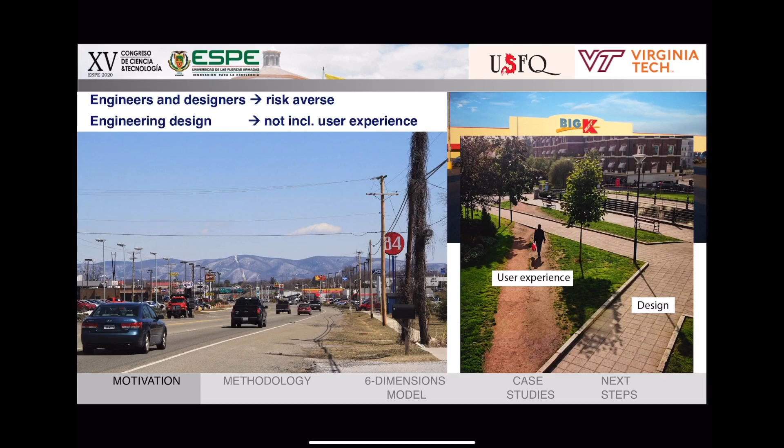Another challenge for engineers designing urban infrastructure is the little feedback from the user's experience during the design phase. Also, limiting our design to norms and codes limits our understanding of the preferences and needs for those that we design for, those using our infrastructure designs. These pictures do not show uncommon cases, but rather a case that reminds us of many places from our daily lives.

Prototyping is a field in engineering that started way back in the 1950s, and it is not until the 80s and early 90s that other engineering fields brought it back as a key component of their design processes, such as design thinking, with a new lens where prototyping is used to observe the user's experience to design the features and their mutual interaction.

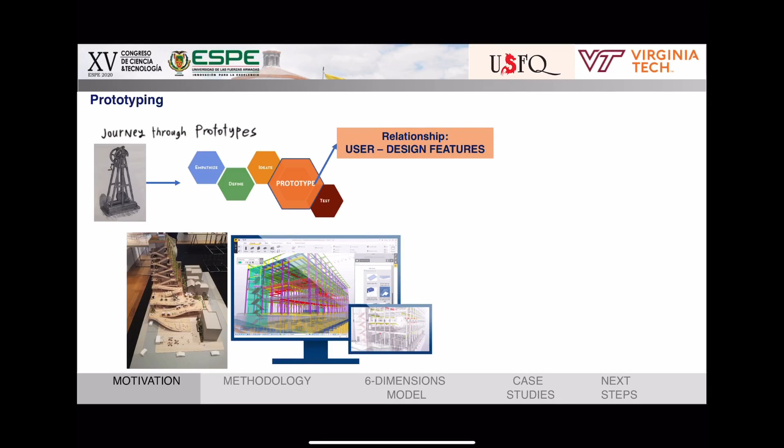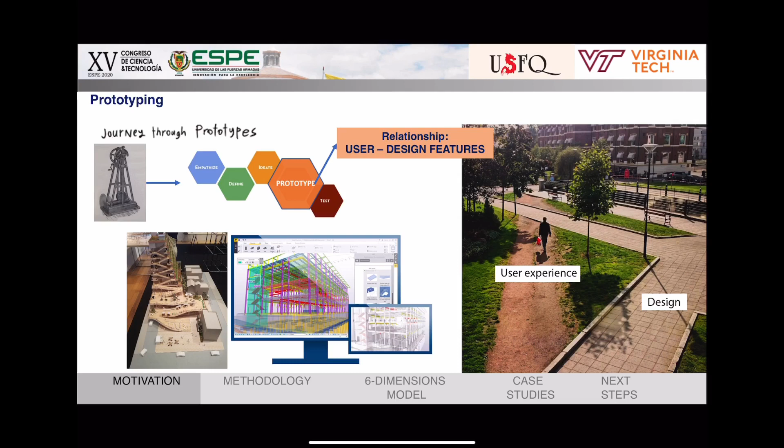In infrastructure design, civil engineers have been creating scale and virtual models, as well as architects, to prototype infrastructure design. The problem with these types of models is that they lack the ability to observe the user experience. You can design this virtually, but you can't see actually how the user interacts over time with the design. But you can do this with physical prototypes.

So, in an effort to contribute to the design of sustainable infrastructure systems, the objective of my research is to operationalize the use of prototyping as a design method by defining the dimensions of what prototyping means and represents for infrastructural design. This can be used for practitioners and for researchers.

For practitioners who want to adopt prototyping, these dimensions offer a guideline for the design and implementation process. And for researchers, these dimensions can help classify projects and future research can correlate the outcomes of the design processes to these prototyping dimensions. For this, we compare about 55 cases that represent 4 types of infrastructure.

To select the cases, we filtered the projects using a definition of prototyping for civil infrastructure that I developed last year that highlights 3 important aspects. The first aspect is thinking on the user. Complete the feedback loop for the flow of information between the users and the designers. Translate feedback into the final design of the same project, which is reducing the designer's perceived risk by removing the fear of failure of a permanent installment.

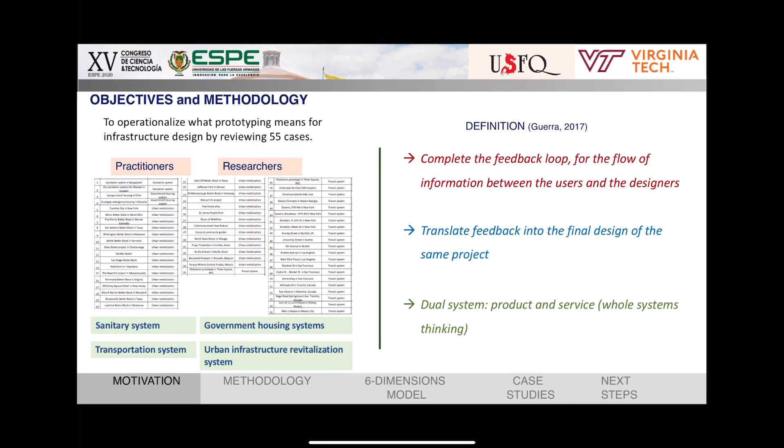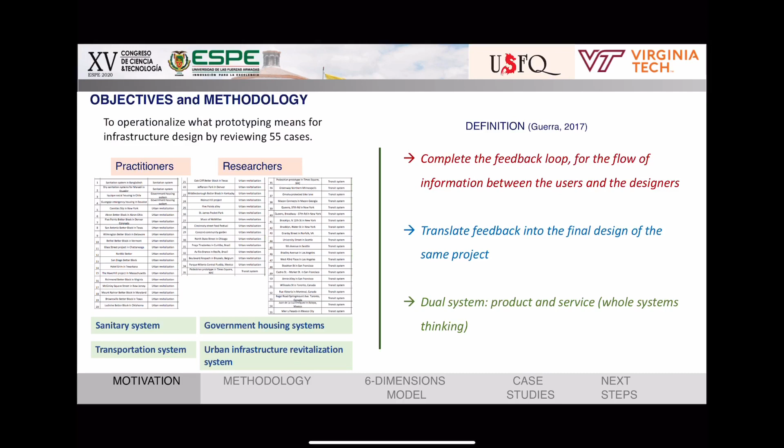And then dual system. This is a product and a service within a whole system thinking perspective, which is allowing understanding this dual nature of being both a product and a service at the same time. It is different than virtual BIM because with this lens, prototyping cares about the user experience and the observation of the user, which cannot be gotten from the virtual BIM, especially for infrastructure, which is a unique system in the sense of being both a product and a service.

The first dimension is the level of formality. This refers to the degree of official permission to build the prototype. On the one side you have the more official ones, which are projects that have been led by a city or a government.

The Times Square prototype in New York City is a good example of this more top-down approach, where a city designs, plans, and implements the prototype that consisted in closing the streets for vehicles to turn them into 100% pedestrian streets. On the other side, we have the informal aspect, which is a kind of guerrilla case, where a particular group is advocating for a solution.

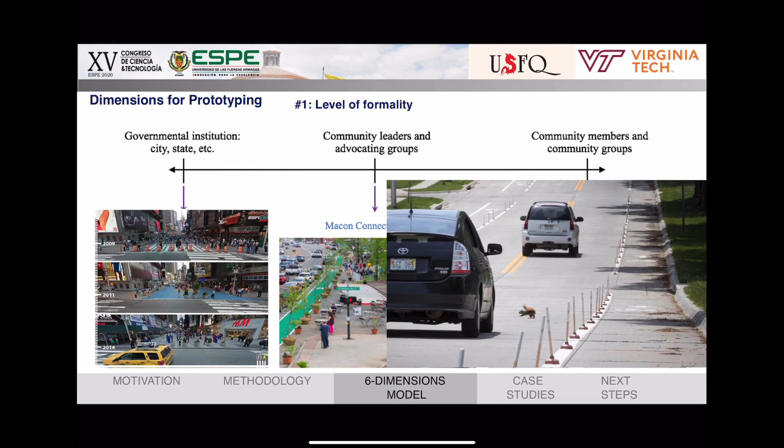And this is a great example where an advocate group built this protected bike lane in Omaha by gluing down to the street over 200 plungers. This lasted about a couple of days until the city took it down, but this is a type of informal prototype that you can see is showing the user the experience of having that kind of infrastructure there.

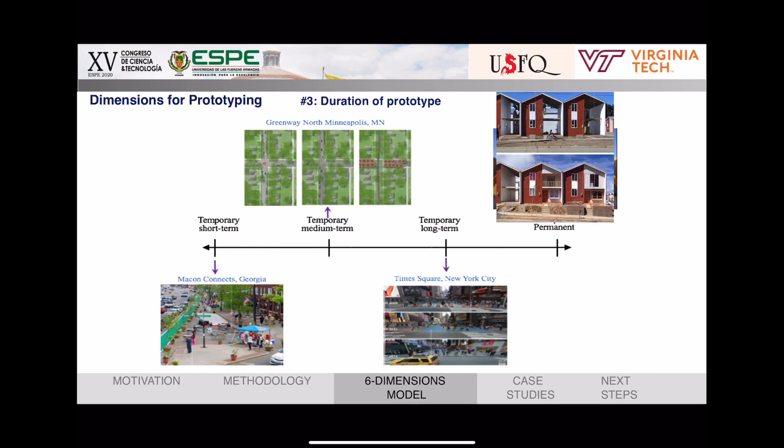The third dimension refers to the duration, to the time that the prototype is left in place for the user to experience. And this can vary from hours to a very few days to many years, or even leaving a prototype permanent. A permanent installment on one side of the spectrum is a great opportunity for prototype government housing projects, because the high number of units to build, 1,500 for example, can be built in blocks of 20 to 30 units that can be used like prototypes.

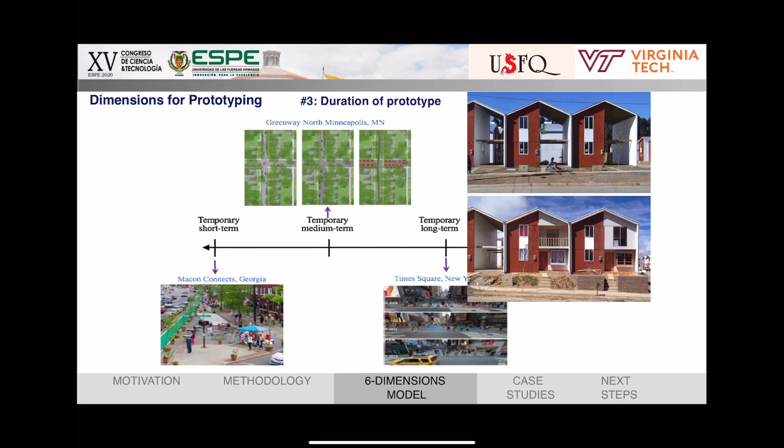In these particular cases, these installments are built to the highest standards possible, because although they will serve to observe and get feedback from the user experience, there will be users permanently using these houses. On the other hand, we have a very short-term prototype that can be an urban revitalization that lasts 2 days, or the plungers to build the protected lanes that lasted just a few hours.

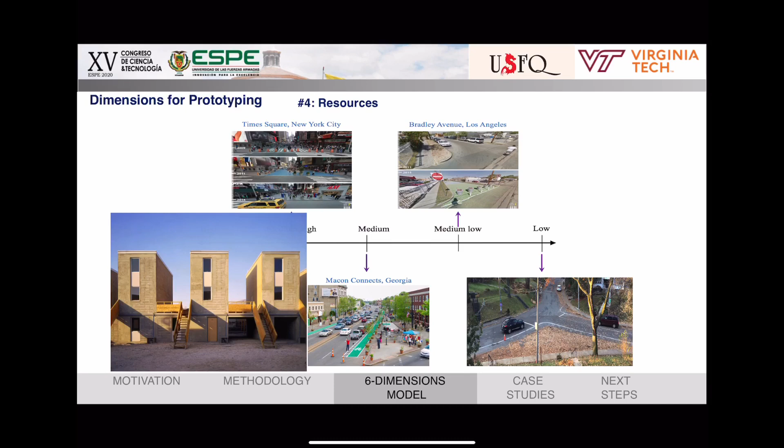Right? So the fourth dimension of prototyping is the resources. And in this spectrum, prototypes go from low to high. On the high side of the spectrum, the amount of resources is important, because they should offer almost the same quality or guarantee as a final project. Other projects, although they are very comprehensive and detail-oriented, include the use of volunteers, local existing materials, or cheap superficial supplies. This is an example of medium scale resources of the spectrum.

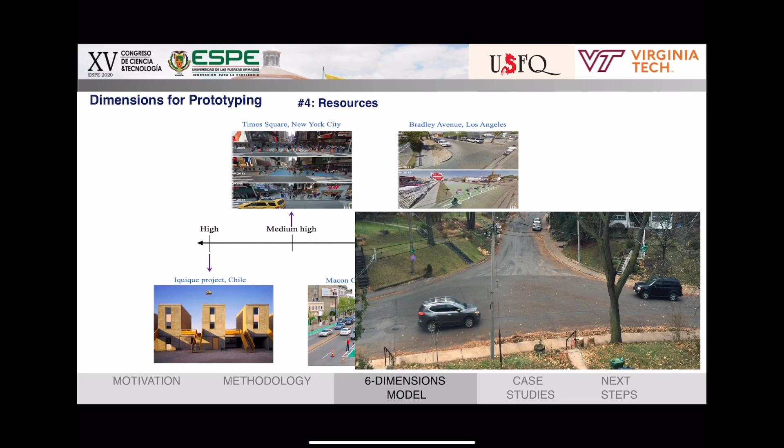Or, on the other hand, we have low resources, like this redesign of this intersection by a neighborhood only using chalk and leaves, as we can see in this picture.

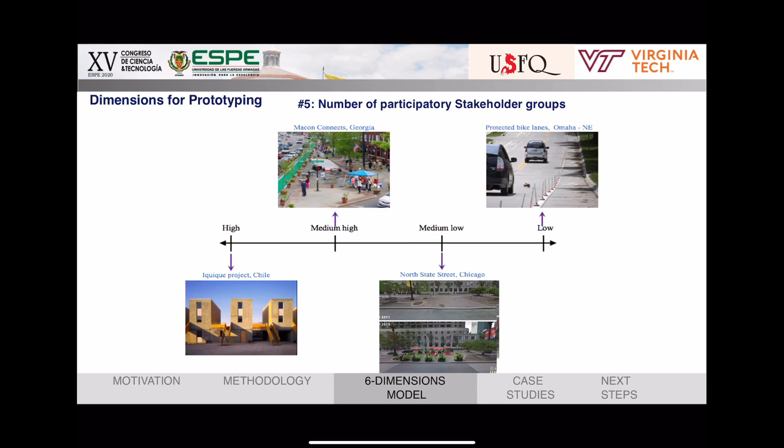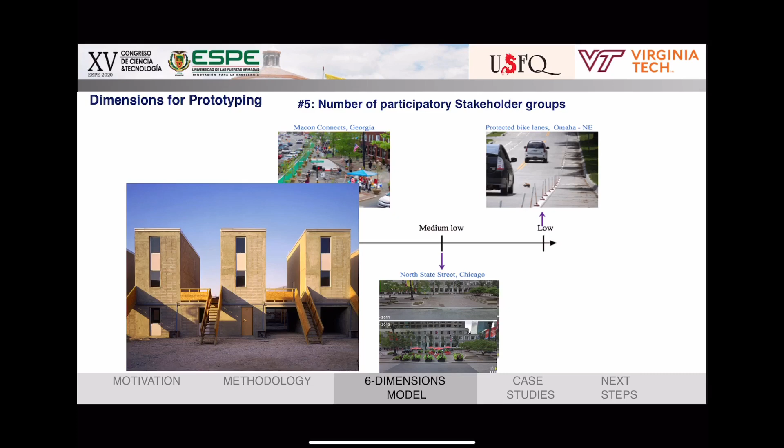On the other side, this prototype in Chicago is an example of a medium-low side of the spectrum, where stakeholder groups come from only 1 or 2 categories, such as government agencies and the direct business owners in that block.

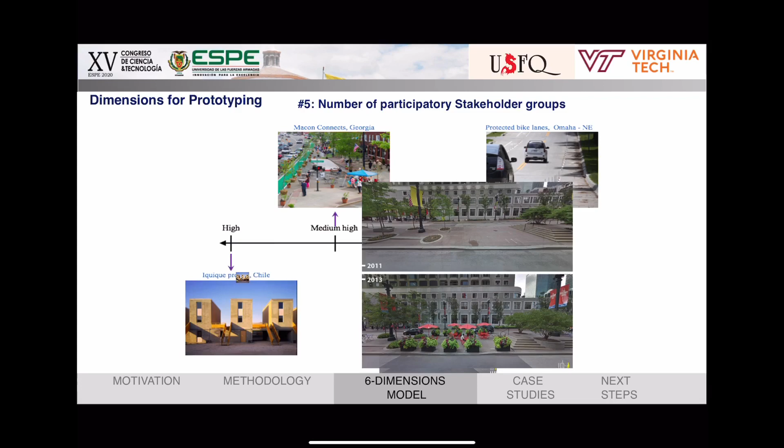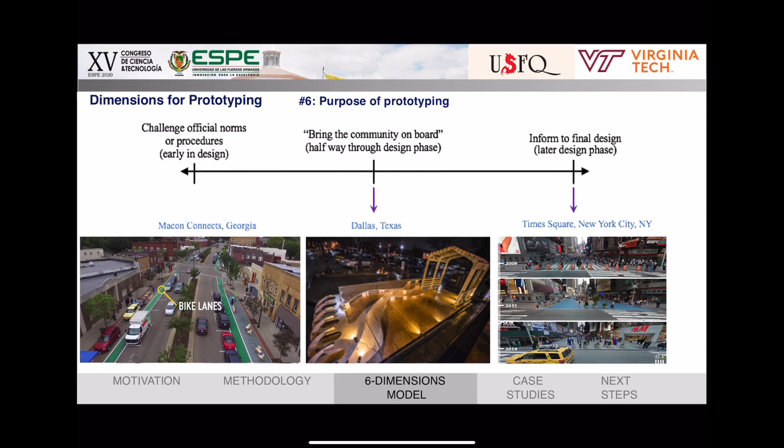So, the last dimension, number 6, is the purpose of prototyping. And for this, we have early, further along, and late stage prototyping. Here, we can see that at an early stage in the design phase, community-led prototyping was observed to intentionally change norms, regulations, or procedures of the local government.

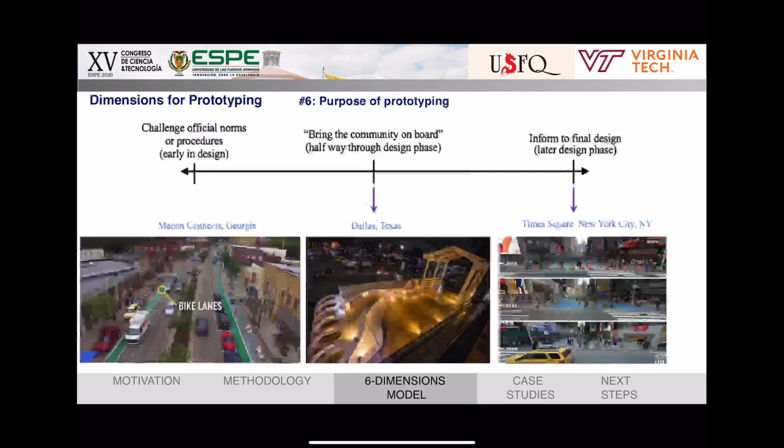Further along in the design, there are more formal prototypes that usually are led by the city, and the prototype intends to get the community on board with the project and provide feedback. While in a later stage, a prototype can intend to close the feedback loop for designers to translate the feedback from users' experience into the final design of the prototype.

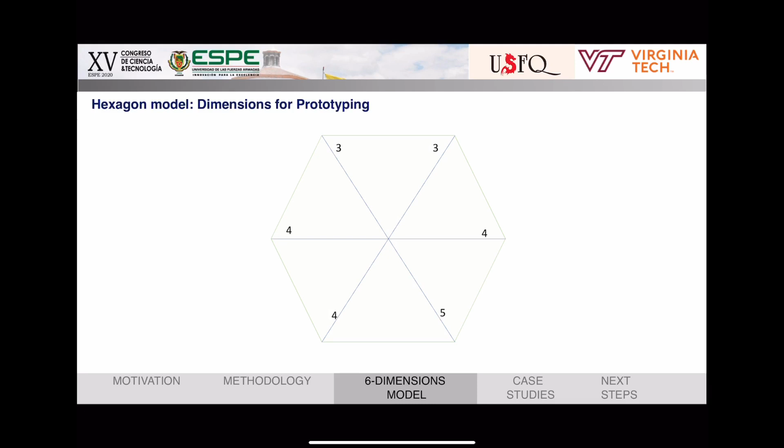And here we can see this hexagon model in which we are looking into the 6 levels of this formality. Those numbers that you see over there are the number of subdimensions on each of these dimensions. So, purpose of prototyping, we have 3 types. The number of participatory stakeholder groups, we have 4 groups, and so on.

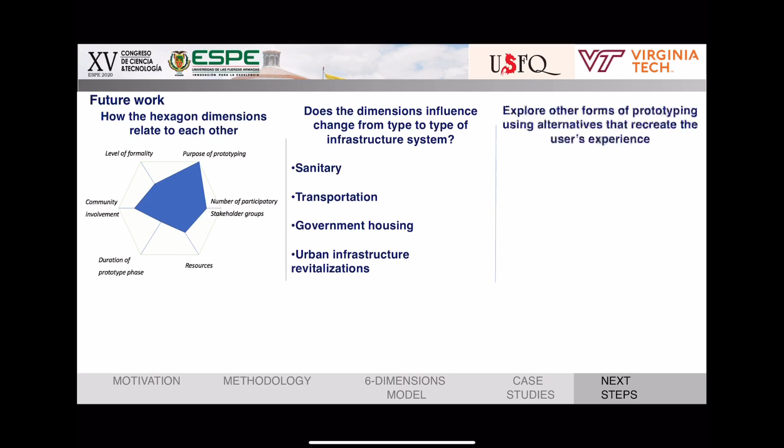The experience of the user. How can we operationalize the simulation, scaled models, combining them with this hexagon right here? And then we want to explore other forms of prototyping using alternatives that recreate the user experience, such as virtual reality, augmented reality, using a lot of the technology that we have.

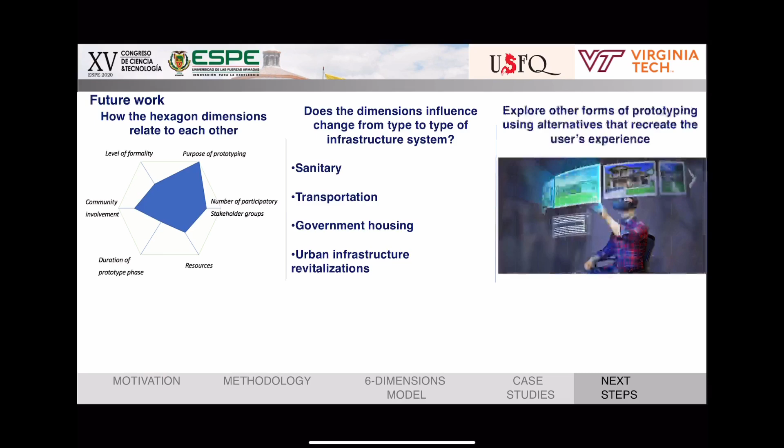Physical prototyping of infrastructure can help designers by removing the fear of failure that exists in designing permanent large-scale projects, allowing designers to break from the status quo, to include more feedback from the users to deliver sustainable designs, giving us an opportunity to understand the users and deliver the best design that fits a particular group of users and their context, allowing us to consider the users' needs and preferences.